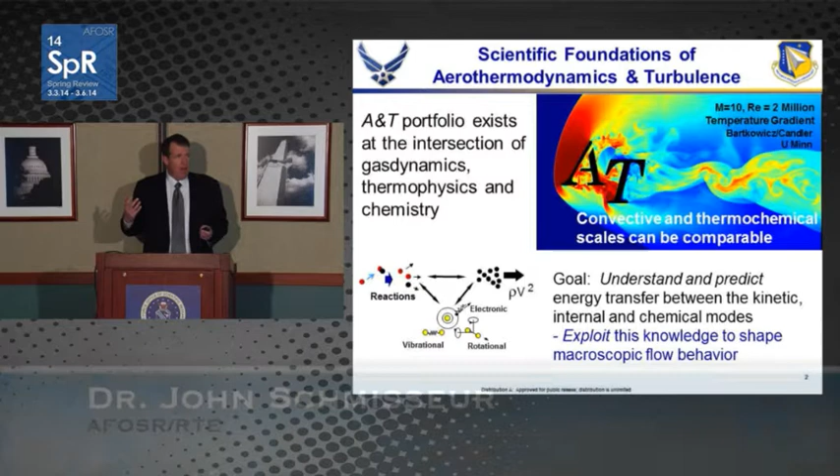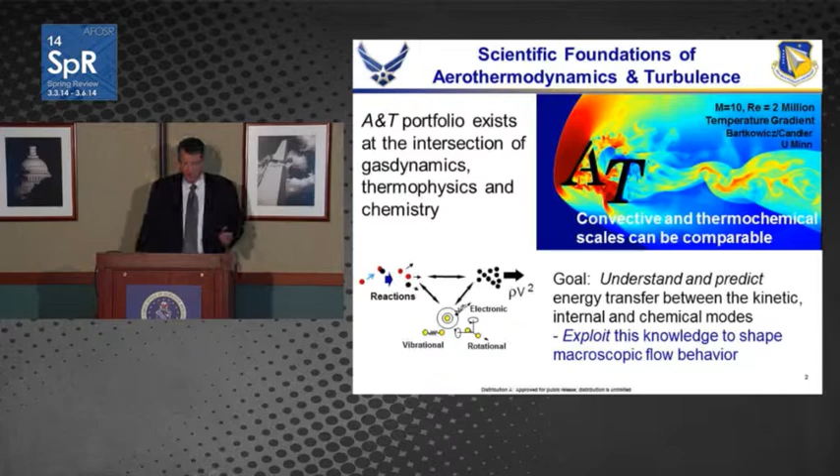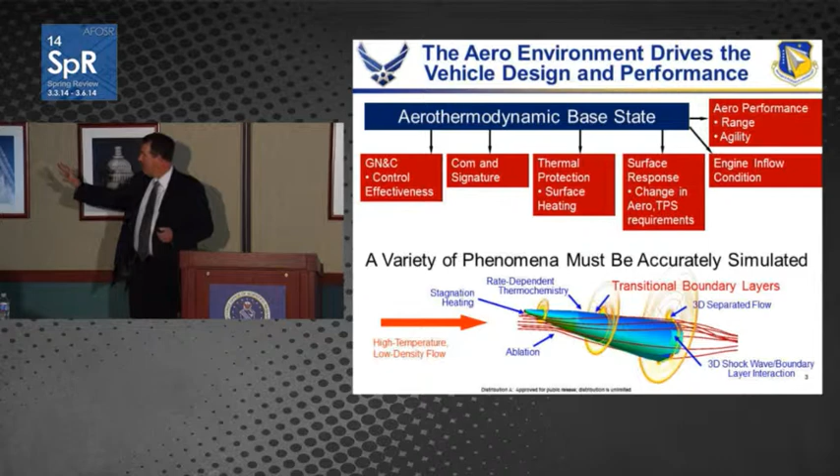I would also argue that this presents an opportunity. If we can understand energy transfer mechanisms between the various modes - kinetic, chemical, internal energy modes - and exploit them, it gives us a new opportunity to do a different type of flow control for these very high-speed flows. This is important to the Air Force because the aerodynamic base state creates the boundary conditions for every other aspect of the vehicle we'd like to design and optimize for high-speed systems. So if the Air Force is going to develop high-speed systems in the future, getting the aero base state right is critical, and my portfolio addresses the underlying scientific challenges of doing that.

The reason this is important to the Air Force right now, and it's always been important for the last 60 years, ever since von Karman wrote Towards New Horizons, high speed has been a critical part of the Air Force plan and vision. But lately, as we look at the pivot to the Pacific and ideas that we want to operate in this anti-access, area denial environment, we're considering...

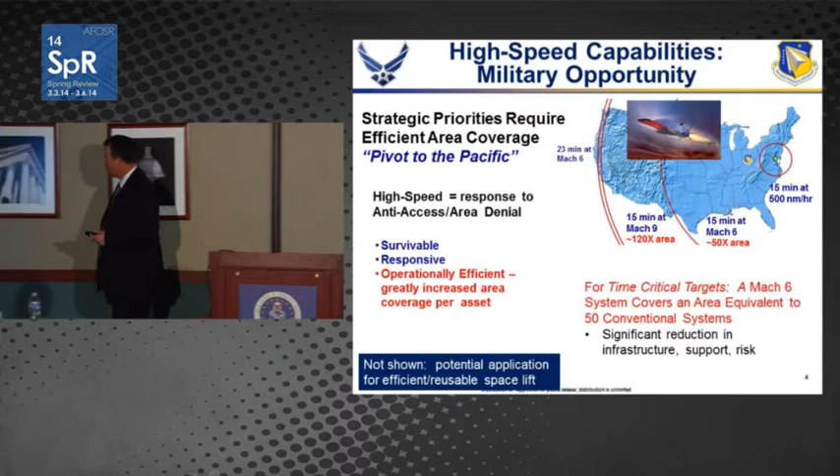Let's use the United States as a reference map here since we're all familiar with the scales we're talking about. If I'm in Arlington, Virginia, and I decide I want to deliver something using a conventional system, in about 15 minutes, shown by the red circle, I can cover most of the Mid-Atlantic region. But at Mach 6, I can get to the Rockies, and at Mach 9, I can get to the West Coast. So if we switch gears and think about having a franchise, say delivering pizzas, using conventional systems, I'd have to have 120 franchises to cover the same area that I can cover at Mach 9. That's about a factor of 50 increase at Mach 6.

The point is, it doesn't matter how expensive the weapon is. If I want to hold an area covered for a specific amount of time, I have leverage - area covered per time. The range gives me that added benefit, and economy of scale allows me to cover a much greater area. So I can essentially reduce all the infrastructure, all the requirements, all the security needs. One or two very secure delivery centers may be much better off economically than, say, 50 or 120 at lesser speeds.

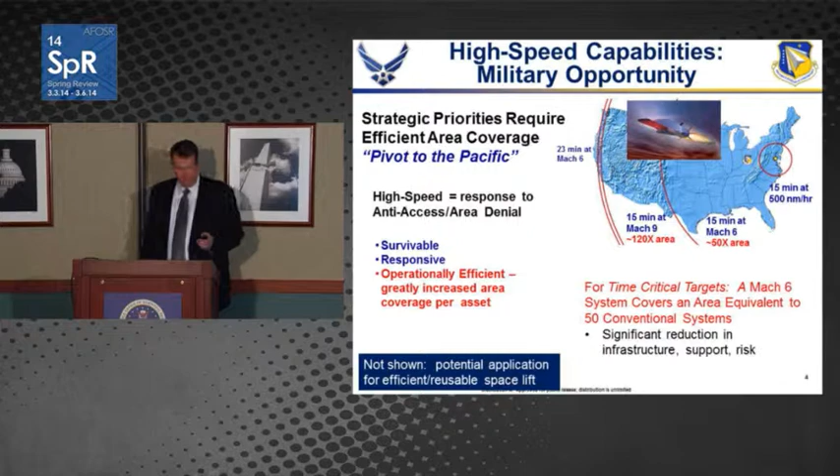So hopefully what we've done so far has set the foundation for the talk - we're addressing challenging science, and it's relevant to critical needs of the Air Force. For the rest of the talk, I'm going to do a couple things. First, we'll talk about the summary of the research thrust in the portfolio - we'll hit the big picture, what the national picture for high-speed research looks like. Then I'll hit some technical highlights and where we're going.

What I want you to get out of that is that we are in a unique position. The way the big picture is, our portfolio has a demand on it - we have a mandate to be transformational and to have leadership in the community. We are, in fact, leading transformation in certain areas. We're organizing the community, and we're establishing new research opportunities for the community as well.

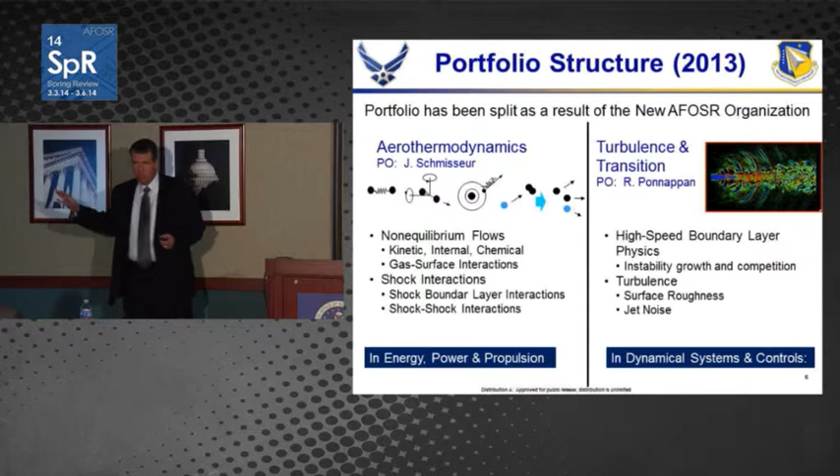Until last year, this portfolio was a single entity that comprised what I'm going to tell you today and the portfolio that Raj Ponnappan briefed on Monday. When I became department chair last year, we split the portfolio into two components. I now manage Aerothermodynamics, Pon manages turbulence and transition. We had 4 research areas that I would have briefed in years past. Today I'm going to focus on the 2 that remain in my portfolio: non-equilibrium flows and shock interactions. Let's get to both areas right now.

If we're going to have better simulations of high-speed flows, we have to reduce uncertainty in both the reactions and the rates. Ideally, you would like to know enough where we can exploit this transient phenomena. We have some partners we work with, including NASA, Sandia, and in the international community we do a lot of work with the NATO RTO group.

Shock interactions, you can't avoid them for high-speed flows. Every high-speed system we have has a shock interaction in it of some type or another. The challenge is, if we just look at the zoom in here, it creates a lot of distortion, a lot of local loads on these types of systems, and we can't predict them. You may have a local separation phenomena, a local reattachment phenomena, where you suddenly produce a significant heat transfer increase or a surface load of 150 decibels into the structure. We simply are challenged to predict those at times.

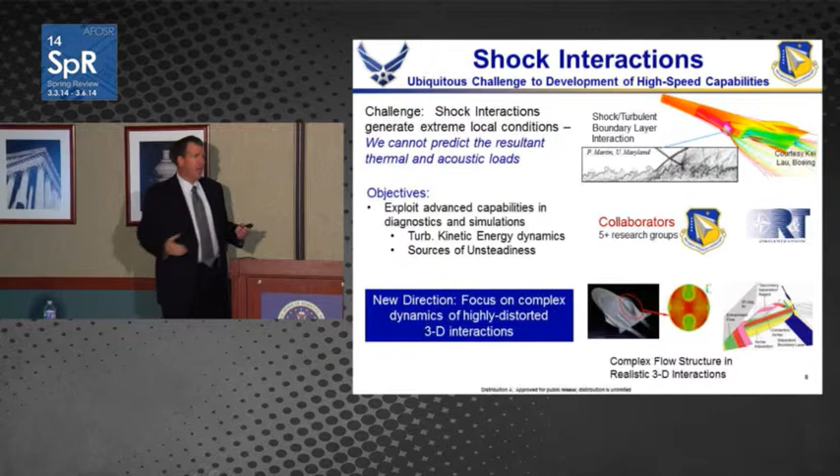So we want to start improving that. We have to understand where the kinetic energy goes in the turbulent spectrum, particularly when it's processed through a strong shock interaction, where the unsteadiness comes from, and eventually we're going to move towards 3-dimensional flows. In fact, that's where I think our leadership is going to be -- leadership within the portfolio, our contribution is going to be taking the community into new directions to look at these highly distorted 3-dimensional flows.

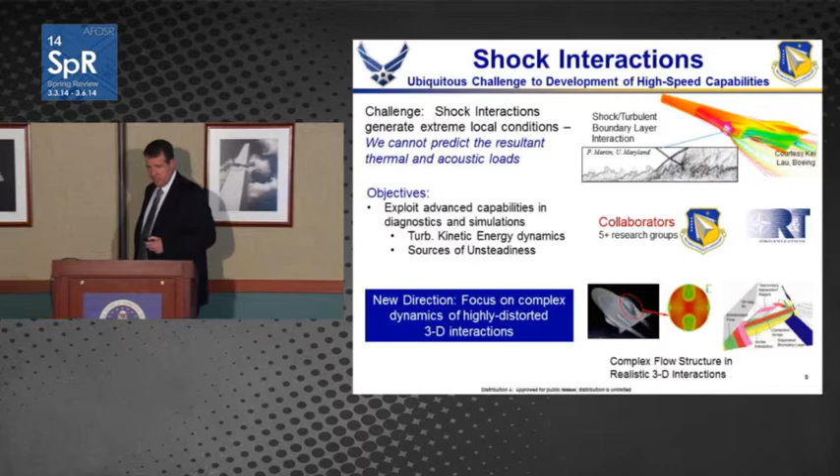This is the big picture for hypersonics. Now I want to put a brief commentary on here: this is not the hypersonics portfolio. When I took over this portfolio 13 years ago, it was in fact called unsteady aerodynamics and hypersonics, but hypersonics is technology and not a science. So there are 3 portfolios at AFOSR that actually address the critical science relevant to hypersonic technologies.

It's useful, I think, though, to look at budgetary investments to give us a sense of what we're dealing with here and where our mandate comes from. The nation invests several billion dollars every couple of years in the development and maturation of high-speed hypersonic systems. Every time we fly a flight demonstration, we're looking at a $100 to $400 million investment, and those are typically developed, analysis done on those based on decades-old tried and true engineering tools. And we wonder why these things sometimes fail or fall out of the air.

If you compare the foundational research investment, the 6.1 national push to feed the pipeline that's going to give us better tools, right now we're putting about $12 million a year nationally into these types of things. And my portfolio is just one portion of that. So the challenge is that there's very few investments out there. If we're going to have an impact, if we're going to transform what's going on, we can't miss. We have to be both transformative and risky. We have to transform current practice, really organize the research community, and create innovative new ideas and research opportunities to take the scientific community in the direction we need to go.

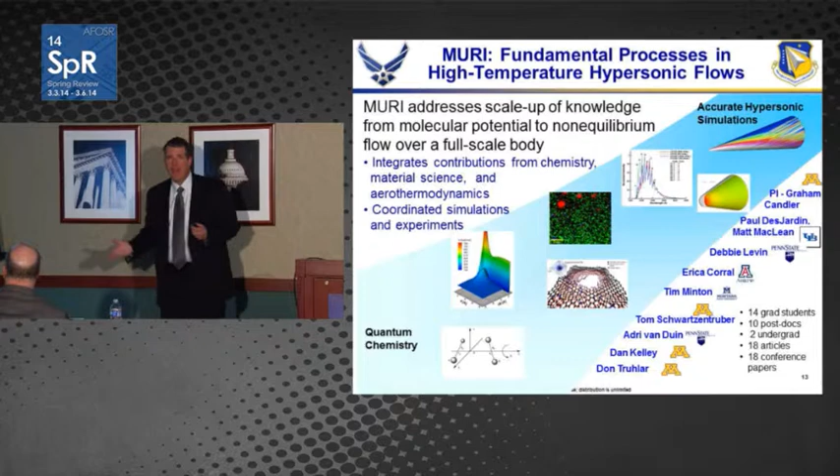Starting at the quantum level, we're computing potential energy surfaces that give us the intermolecular potential. Then we apply those in molecular dynamics simulations, scale up at the mesoscale, and finally get to CFD, continuum model simulations. All through the process, we have companion experiments actually validating and providing guidance, confirming that the physics is being done correctly.

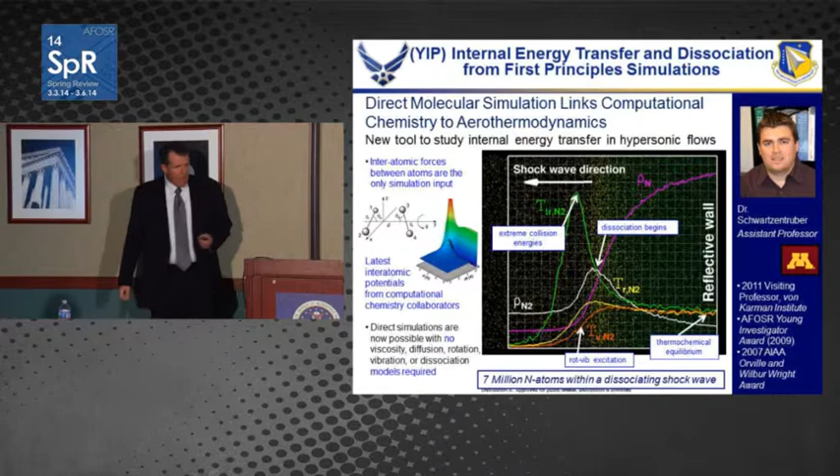One of the highlights I'd like to show is from a member of that MURI, whom we also sponsored under YIP. This is Tom Schwartzentruber from the University of Minnesota. Tom has used these quantum potential energy surfaces to inform molecular dynamics simulations, and then incorporated that into some of the CFD methods we use for particle simulation, something called direct simulation Monte Carlo.

In the past, where we would model potential energy, we'd model various reaction rates. Using these potential energy surfaces, Tom can actually use that as the only modeled input that goes into the computation of a strong shock wave. So this is a classic case of a shock tube.

Shock bounces off the reflective wall, moves back, creates a very elevated temperature condition at the end. The yellow dots are nitrogen molecules, the green dots are nitrogen atoms, and what you can see is he's plotted on top of that the various internal energy states.

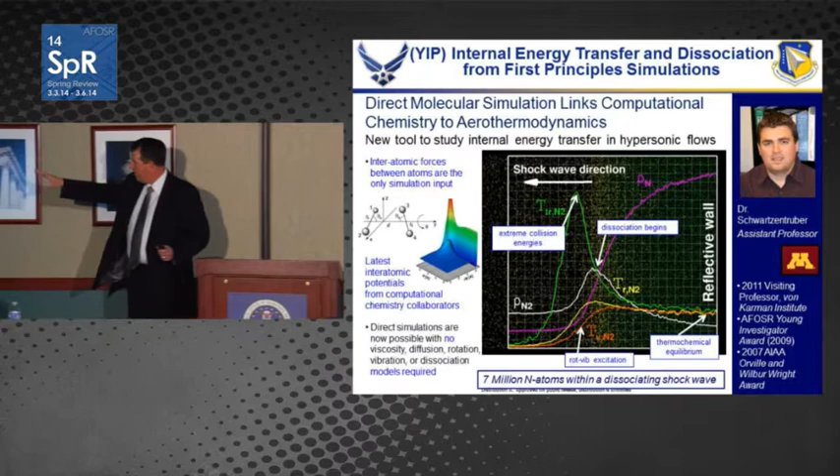We have for the first time basically a direct molecular simulation, the particle analog to a continuum direct numerical simulation, essentially a model-free simulation of the transient internal energy states associated with a shock wave. And we're really excited about where that's going.

This is a simulation of about 7 million particles. One of the things Tom did to improve his simulation capabilities is also scaling up the way he does simulations. So he took molecular dynamics, looked at it, and said some of my DSMC methods would apply to making these simulations better. So he came up with an improved version of this.

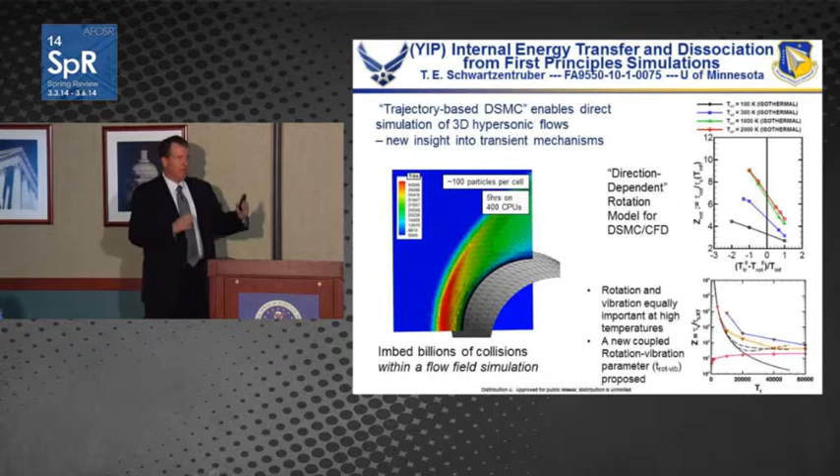A lot of times in simulations, they'll compute a particle, it bounces off something, they have a collision, and it kind of sits there. What Tom said is, I can redo the algorithm, do the numerics, and accelerate all that time between collisions, therefore focus most of my computational time on the collision part itself. He's able to speed up the process and have much larger simulations than we previously would have had.

As a result, we're looking at now applying this method to relevant flows, such as the nose tip here, embedding billions of particle collisions within an actual flow field simulation. In applying this in some of the preliminary work, we've had some very interesting discoveries.

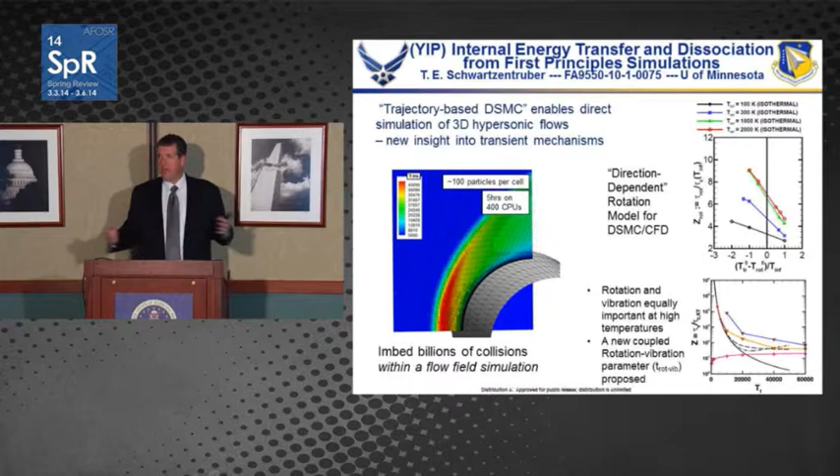Traditionally we would model the rotational excitation or de-excitation, the rotational characteristic time, as kind of being one representative number. Tom's simulations have indicated that, in fact, the excitation state for rotational states is a much faster process than the de-excitation or relaxation state. And in fact, there are several associated timescales involved, one for excitation, one for relaxation. The two are separate, and modeling them with just one representative timescale is probably not the most accurate approach.

We also have international and military partners involved with this. This is actually a joint effort between the University of Queensland and AFIT. We're sponsoring the AFIT part of this. Work's being done by Captain Chris Alba, who I've known for a long time, and I expect to have a real impact on where we go in this field in the future.

At the University of Queensland, they're using an expansion tunnel to create a very high enthalpy hypervelocity flow over a heated carbon piece that represents a nose tip. They're making spectroscopy measurements and looking at the radiation emission from the CN compound formed as part of that interaction.

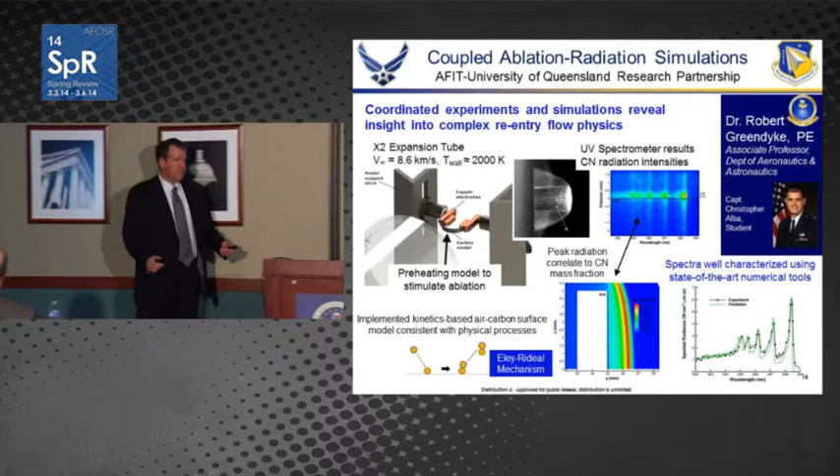What they're doing at AFIT is using some of the methods developed in the portfolio to look at that radiation, model it, and on the lower right-hand side here, you can see that the actual simulations are agreeing quite well with the experimental data. We're excited about this, and I think it's a great international component within the portfolio.

Now let's move on to another topic. Our new research direction is looking at energy transfer. Historically, this portfolio has always been considered the hypersonics portfolio, and that's a good thing, it's relevant, but it's not all we do. A lot of the science we do is relevant to other things. We wanted to try and rebrand ourselves to think about what's the science we're actually doing.

So we've been emphasizing this idea that we address fundamental mechanisms of energy transfer. That allows us to start thinking about other things. I would say that the gas surface interaction, in a more generic sense, is something that we can really contribute to, various types of thermal management and energy phenomena. But it's also positioned us to try and interact in a more positive way with the other portfolios within AFOSR.

We've been very fortunate to be the recipient of one of our basic research initiatives that has really fostered some integrated work with 4 other portfolios within AFOSR, and we've benefited from it. I'm going to talk now about a couple of the BRI efforts. I would note that one of the key things out of this BRI is that a lot of my PIs are now doing work as PIs in other portfolios within AFOSR. I consider this missionary work. My PIs are taking ideas from my portfolio, awareness of what the challenges are, out to chemistry, the plasma dynamics portfolio, other places, and they're going to come back later on with new techniques, new methods, new insights, and we'll apply them to things that are of interest to my portfolio.

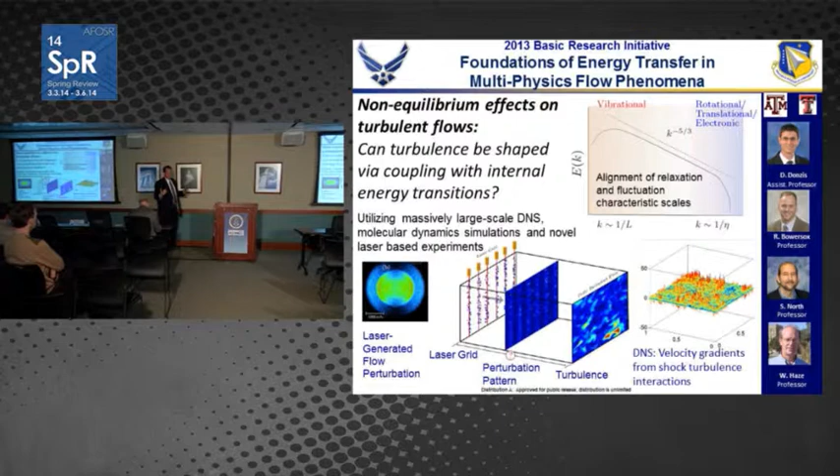Bill Haze, you heard Mike's work this morning talk about. So asking the question, if you look at the characteristic turbulent kinetic energy spectrum, can we align relaxation times from different internal energy states? It's color-coded here. You can see vibrational relaxation at one end, rotational, translational, electronic at the other. Can we shape the turbulent kinetic energy spectrum by lining up strategically the characteristic timescales of the fluctuations with different relaxation rates? We're about a year into this.

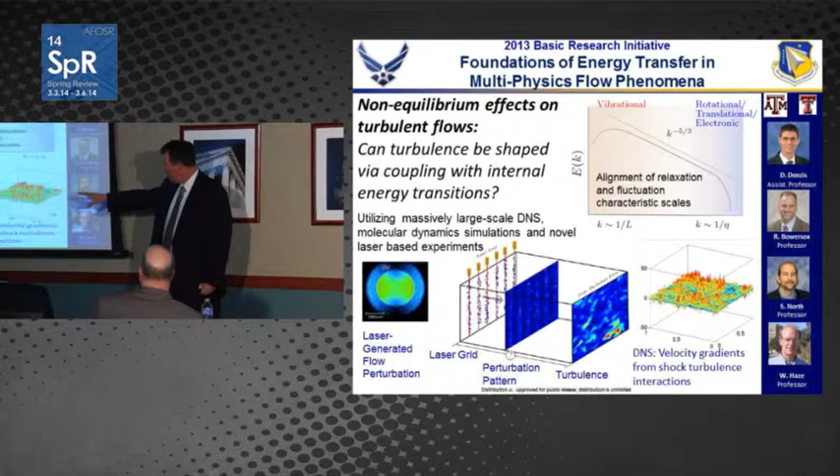There's a lot of work yet to be done. It's looking very promising. But here's what these guys are doing. They're creating a combination of experimental and direct numerical simulation work. On the experiment side, they're creating these grids of very well-controlled turbulence.

You take a flow field, you seed a couple of molecules into it. One of them is SF6, the others I can never remember because I'm not a chemist. But some molecules you introduce, depending on which trace component of gas you introduce into the flow, you can photodissociate it with the laser. And then based on your gas choice, you can create pure rotational, pure vibrational, or pure translational energy in a very regularly spaced, spatially oriented turbulence grid.

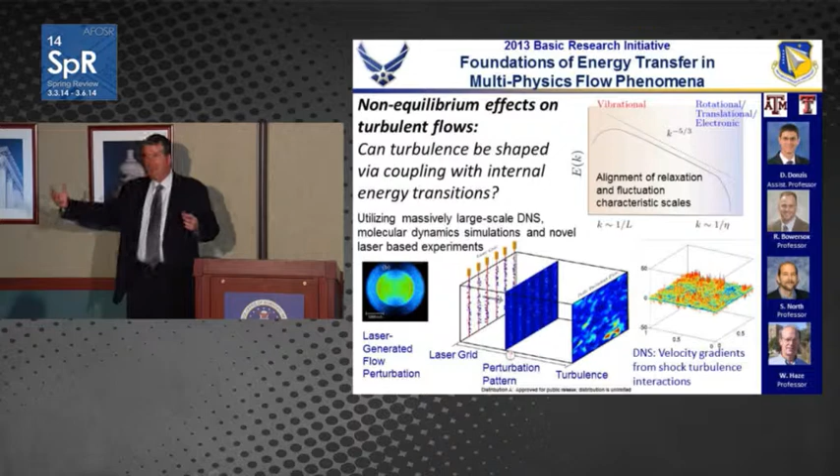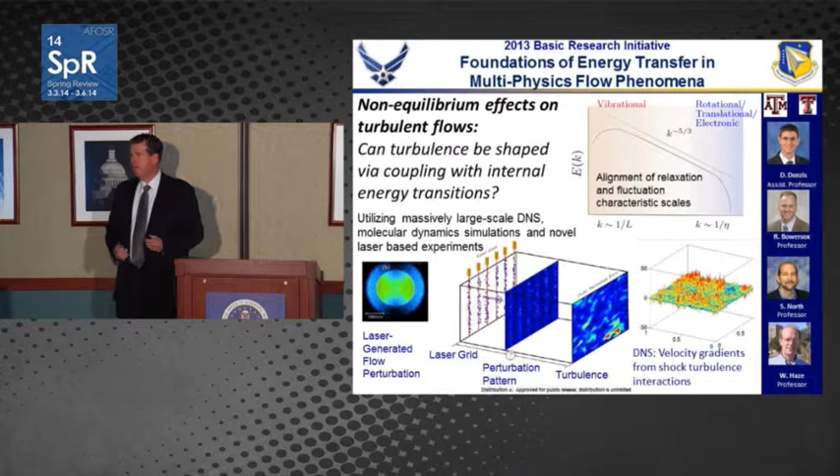So we're now creating well-defined turbulence of a very specified type in terms of the internal energy state. And then we can watch how it relaxes over time with some of the diagnostic methods these guys are employing. In parallel, Professor Donzis is doing simulations of these types of flows using very large-scale direct numerical simulations. So we're looking both from a modeling and an experimental side at the detailed energy reactions that are occurring.

One of the interesting things also at play here is that the Texas A&M guys have a diagnostic method that's kind of based on the same type of effect. The Venom technique is vibrationally excited nitric oxide monitoring. What they do is seed nitrogen dioxide into the flow field, use that same photodissociation process to create excited state nitric oxide. That nitric oxide, they can then interrogate using planar laser-induced fluorescence.

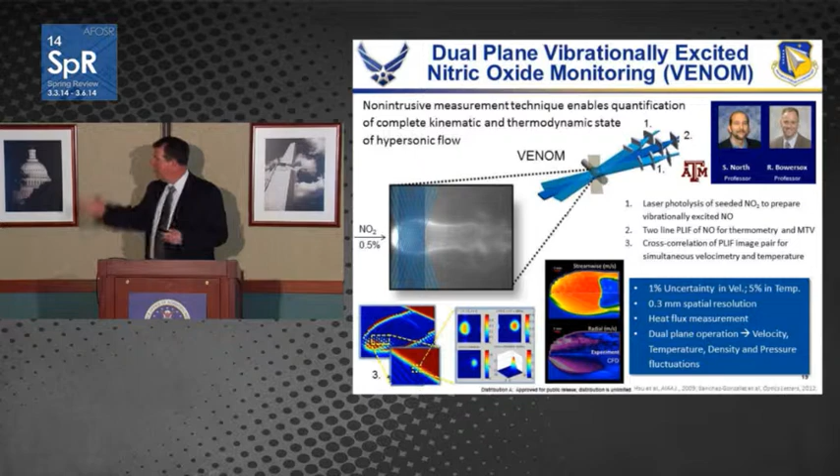And the bottom line in all this is that using a dual-plane approach, they can make simultaneous measurements of the velocity, temperature, density, and pressure fluctuations. If you look at some of the things we want to model in turbulent flows, being able to look at all those things simultaneously allows us to look at some of the turbulent kinetic energy and stress rates and other things that have been a challenge to measure experimentally in the past. So this provides us a great opportunity to look at new insight into the physics of turbulent flows.

Now this is the other BRI I like to talk about. This is work done at the University of Texas, led by Phil Varghese, including Noel Clemens and Venkat Raman. It's very qualitatively similar to what we've talked about in the last couple of highlights, but this is different because it's looking at supersonic combustion and the role of non-equilibrium processes in that combustion process.

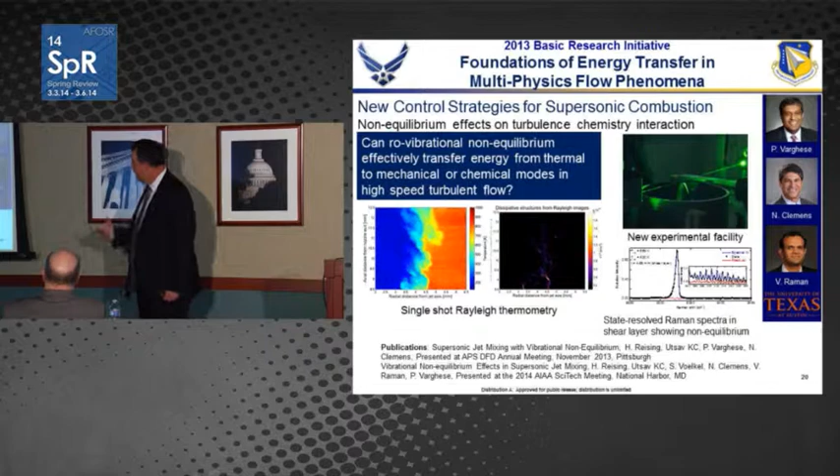So they've got a new supersonic burner facility, and they're applying state-of-the-art spectroscopic diagnostics to that. But they also have a very interesting numerical approach. Earlier we talked about Schwartzentruber's work and how he has potential energy surfaces that have been developed, and then he uses those as the only modeled input in his simulation.

And it's interesting when they started employing this in some very large-scale simulations. The direct numerical simulation of a non-equilibrium hot jet is shown here. We think this is the first - you always hesitate to say this is the first of its kind - but we're not aware of much similar work like this out there. So this is a DNS of a supersonic reacting jet, including the thermal non-equilibrium inside that.

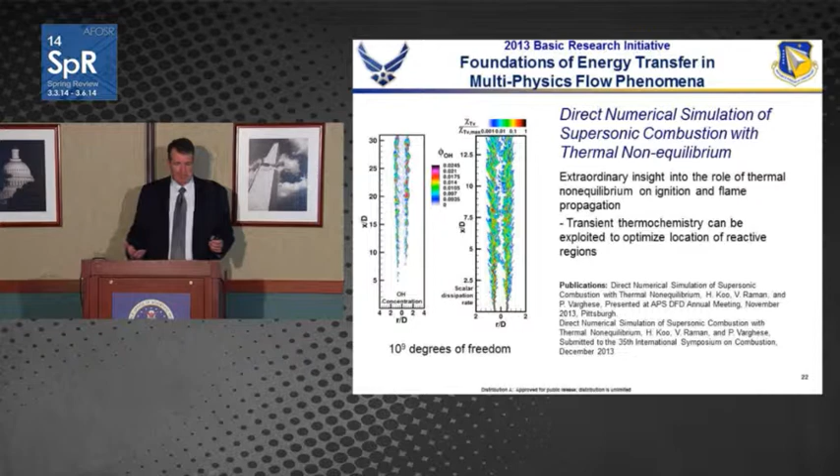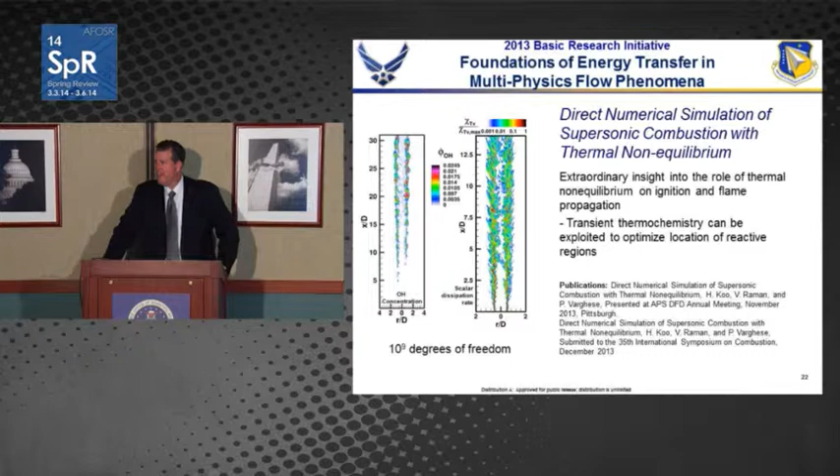It's about 10 to the 9th, like a billion different degrees of freedom in this simulation. It's a very complex thing, and we're interested to see how it's going to turn out.

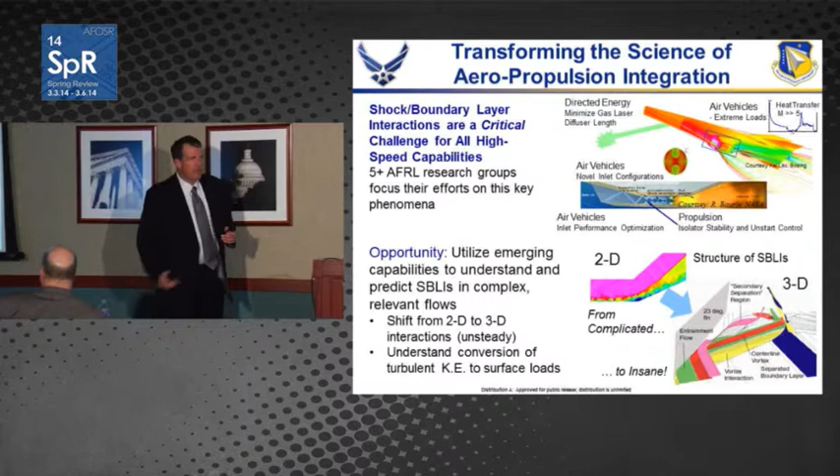The other area I want to talk about is shock interactions. They're ubiquitous, they're everywhere, they're a pacing issue for high-speed flows. They're of interest to a lot of things as well. Looking at our icon of a high-speed system, they create extreme heat transfer on the surface, incredible acoustic loads that have to be handled in the structure, and they can cause distortion and unstart in the inlet.

That circle with the green blobs in the middle is what happens to the inlet of an axisymmetric configuration when you've got it off-axis angle of attack. So that's what happens when a shock interaction occurs inside a round inlet, and those green blobs are the low momentum boundary layer fluid that's going to get sucked into the engine and potentially cause unstart. Understanding this phenomenon is a pacing issue for development of high-speed propulsion.

Interestingly, those directed energy guys are interested in this as well. If you're looking at a directed energy gas laser and want to incorporate it into an aircraft, the diffuser length is a really important part of that. I can't have 50, 75 feet of diffuser to slow down the gas used for the laser. So those guys rely on a very well-controlled shock boundary layer interaction to minimize their diffuser length.

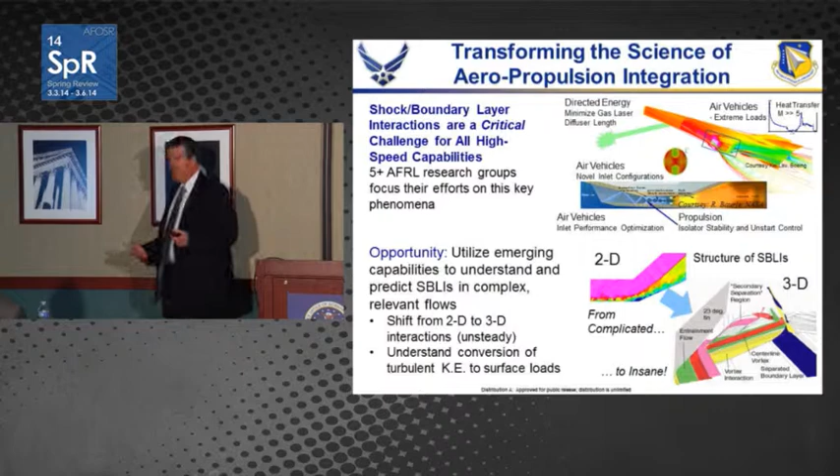So beyond aerodynamics, there's a lot of gas dynamic potential things that can occur that shock interactions are part of. I think the directed energy one is very interesting because it's a very low Reynolds number, non-equilibrium process, and I think we could take some of the methods we've been developing and really attack that problem.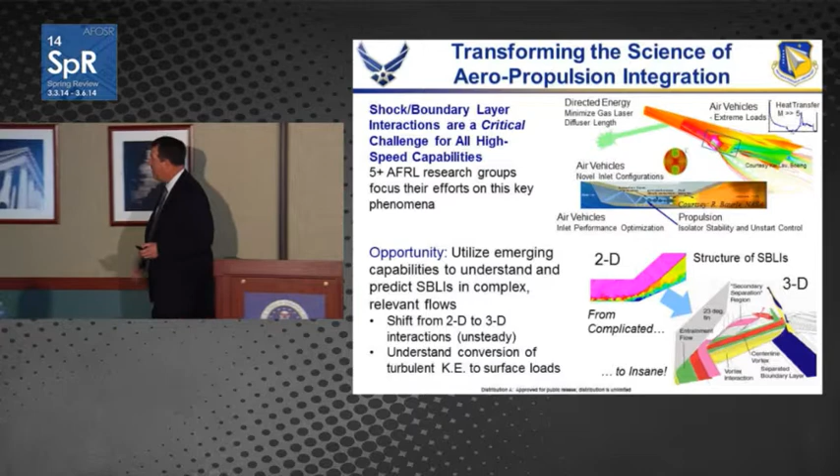There's about 5 different groups in AFRL interested in this as well, and we've been working to coordinate and ensure they're all talking to each other. So our opportunity is to utilize some of these emerging capabilities to drive this in a direction.

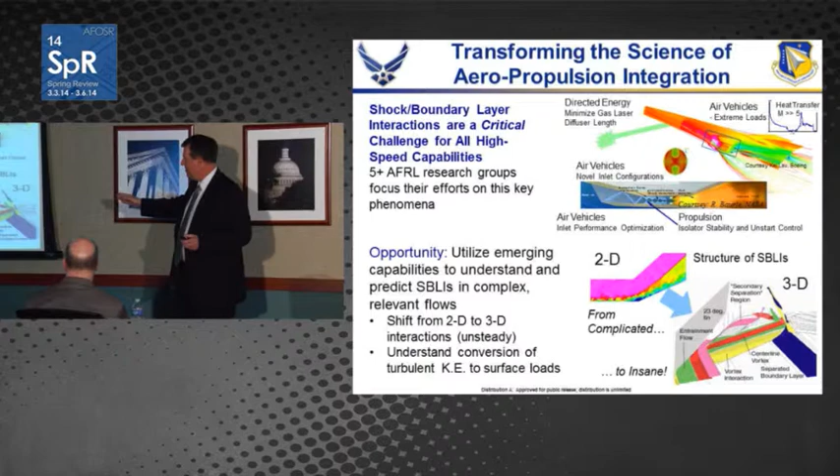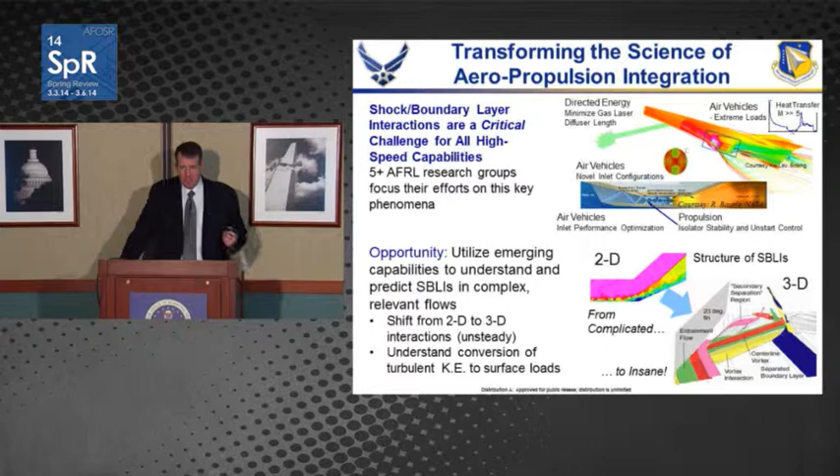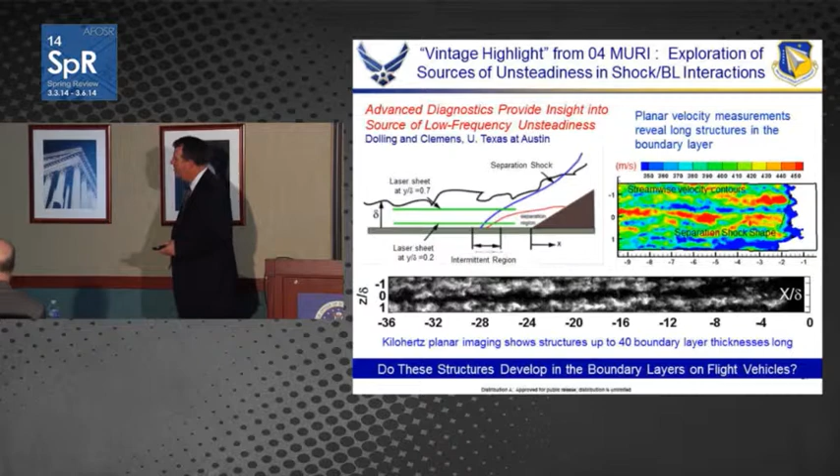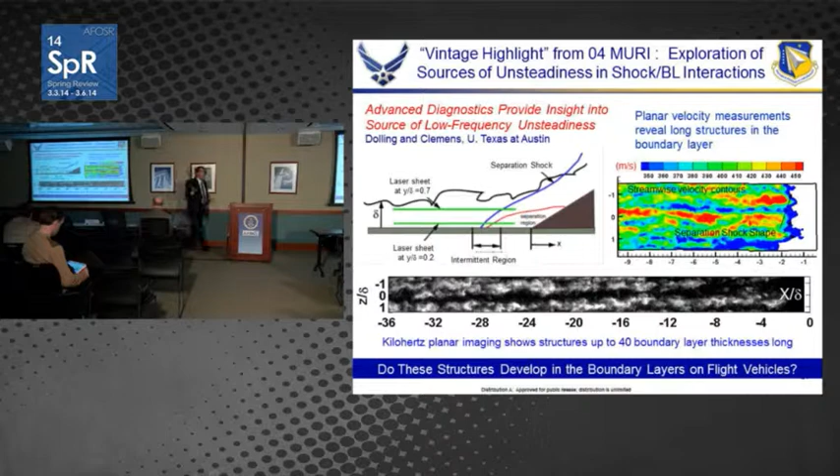This is a little look back. In fact, I brought a vintage highlight from 2004 - this is a MURI that started then, so I'd say I probably showed this between 2007 and 2009. This is work by Dave Dolling and Noel Clemens at University of Texas. You can see their two-dimensional ramp-generated interaction in the upper left-hand corner. What we're looking at is a couple of images of the flow, the turbulent flow going into that interaction.

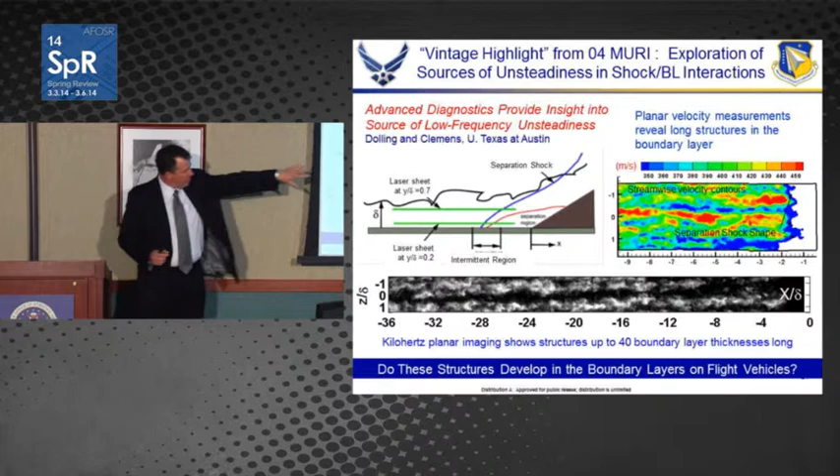That white area on the right-hand side is the shock wave ripple structure in a span-wise direction. So notionally, this is a two-dimensional interaction, and it should be kind of span-wise symmetric, except these hot streaks in the boundary layer - these long, coherent, organized streaks - are actually driving this span-wise rippling. We've got this span-wise variation, and the dynamics of that.

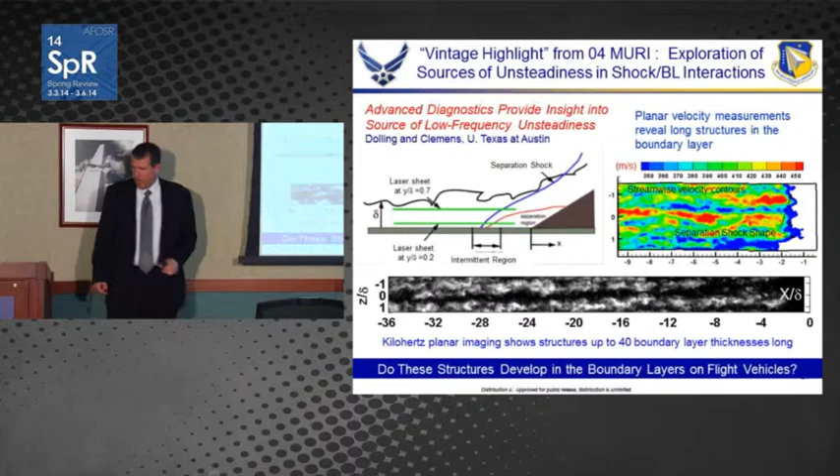This is images from their wind tunnel test showing these long, coherent streaks in the boundary layer. They indicate that this actually drives a span-wise unsteadiness effect. That unsteadiness can generate, in two-dimensional interactions, acoustic loads of 140, 150 decibels. That's important - we have to take that into account.

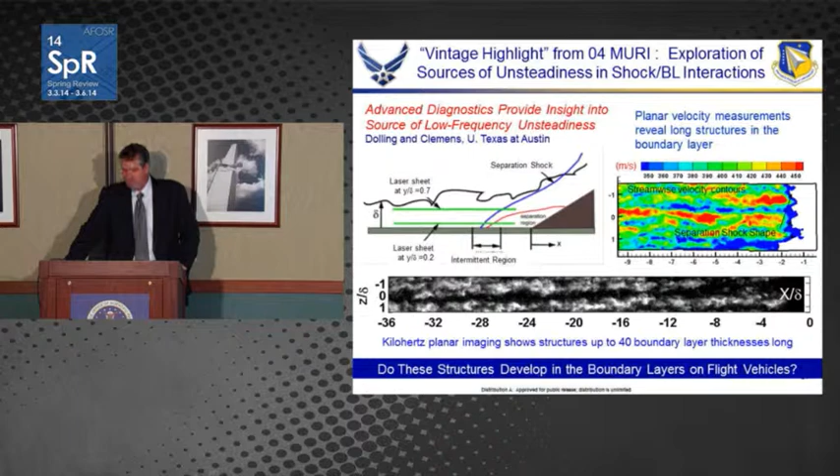But this is interesting - Pino Martin out of the University of Maryland did some direct numerical simulation for us, looking at these phenomena as well. She sampled her results and looked at the development of hairpin vortices that would contribute to the growth of these superstructures. One nice thing she did was actually sample her simulations analogously to the way we would do experimental work, so you had an apples-to-apples comparison.

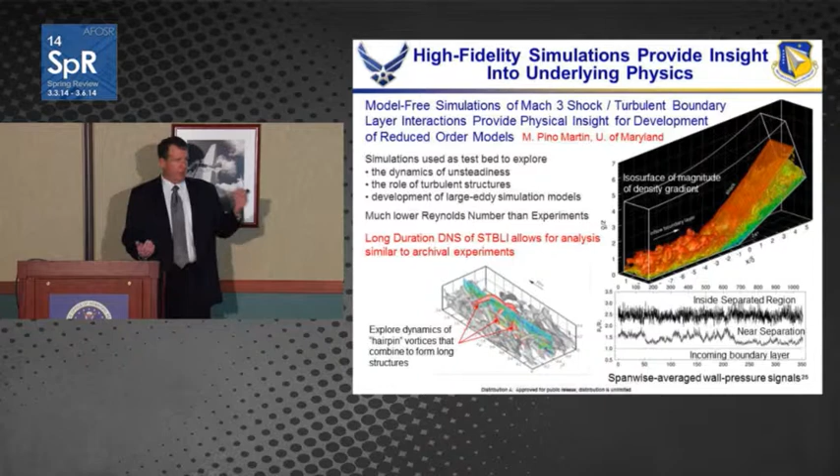Here's what the experimental guys got, and she sampled the DNS in the same manner, so you can compare them both. What you see is that, in fact, she sees some low frequency unsteadiness as well - again, all looking at these two-dimensional interactions. HIFiRE Flight 1 gave us flight data on this type of phenomenon.

So we never understood whether these long structures, this fundamental unsteadiness, came from a wind tunnel artifact or whether it was something we actually had to worry about in flight. So one of the things we wanted to get out of HIFiRE Flight 1 was, what does the unsteady nature of shock interactions look like?

The data from HIFiRE Flight 1 is shown right here. I've shown the HIFiRE flight data and then data from Dolling and Murphy from probably around 1990. Qualitatively, the same unsteady nature appears in both. So we know this is a phenomenon that occurs on flight vehicles. It's not a wind tunnel artifact.

We need to understand a little more. There's been a lot of work trying to understand this. In fact, the community has focused on this for the last several decades. So why are we going in a different direction? Here's why: we're not going to hang square inlets on a box underneath future systems.

Future systems are going to look like this. They're going to have axisymmetric inlets. They're going to be integrated in some fashion. They're going to give us highly three-dimensional flows. And so all the dynamics, everything I've talked about with these nice, low frequency unsteadiness, there's a recirculation bubble in there, and a lot of people have been looking at how does that bubble dynamics work?

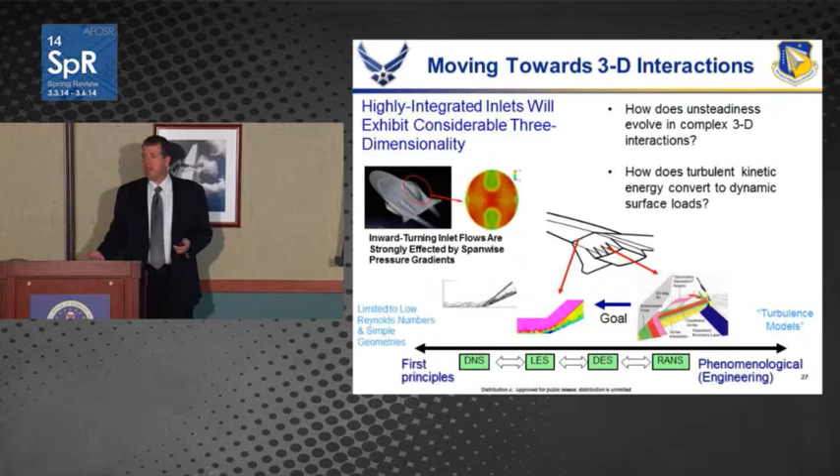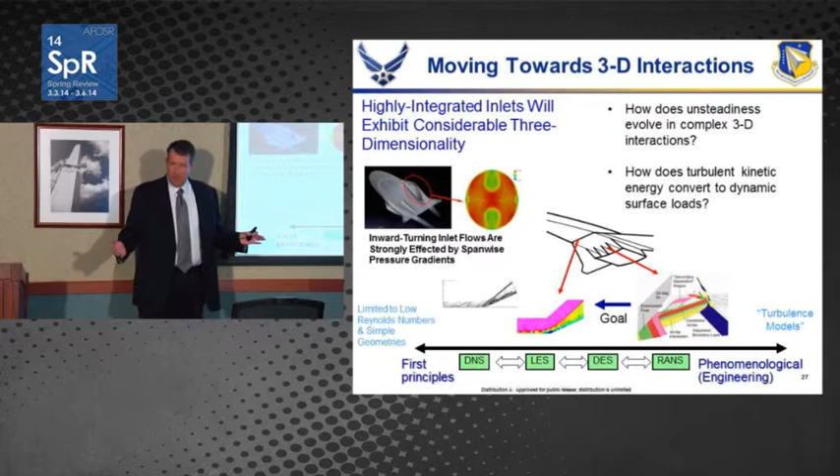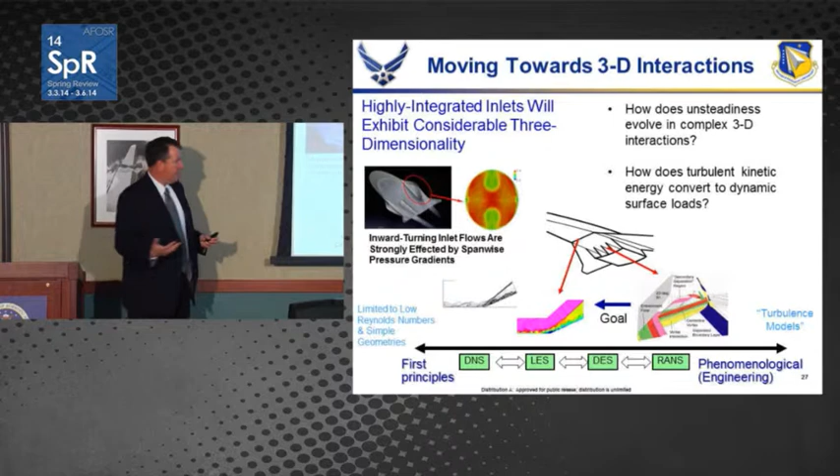It's going to be hard. Right now, the only thing we can do for some of these three-dimensional flows is Reynolds Averaged Navier-Stokes, which any of our scientists know that's not what we want to do. We've got a lot of modeled terms in there. Turbulence models always give you problems, but that's what we can do right now for very large three-dimensional flows of this type. Our goal is to start moving this more toward high fidelity, looking first at detached eddy simulations, LES.

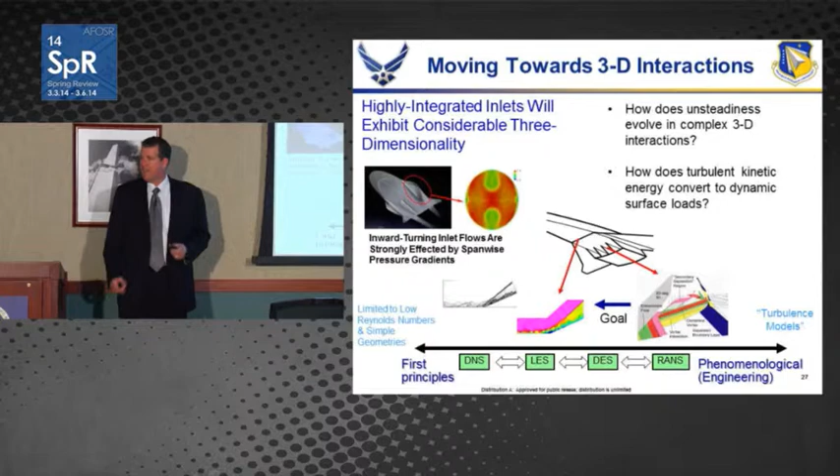I don't know if we'll get to DNS, under very, very low Reynolds number, very controlled conditions, possibly. We've got to start looking at more high fidelity simulations of this type of flow, and we want to start taking the community in that direction.

So let's summarize real quick. There's a very strong application pull for what we do in this portfolio. The Air Force is interested in this. It's needed. We've got very limited resources. On a national level, we are the program addressing things in this area. We partner with other things, but as far as the DoD is concerned, we're it.

But there's broad potential impact. And so I would argue that we have a portfolio mandate. We must transform current practice. We have to organize a research community, and we need to create new research opportunities. The three things I've shown today, I hope, address that. Going kind of in reverse order.

We're trying to transform the way we look at high-speed inlets and shock interactions by focusing on three-dimensional aspects. The work we're doing in gas surface interactions, really bringing together the chemistry, materials, and fluid dynamics community, is innovative. We're looking at integrating molecular dynamics simulations. I would argue that most of us would have predicted this. We would have seen that coming. That's the next logical step. It's hard, we're at the forefront, but most of us would have said, yes, that's the next logical step.

I would argue that what we're doing in energy transfer is unprecedented. I haven't talked about some of the things that have come out of the portfolio. I think Pon has some things in his portfolio in terms of transition control with kinetic energy to internal energy state transfer, but exploiting the energy transfer between internal energy, chemical, and kinetic energy states for the purposes of flow control at a macroscopic scale is something I think we have not really thought about, and I would argue that's an unprecedented direction. So again, we have a balance of things in the portfolio, and I'm really excited about where we're going with it.

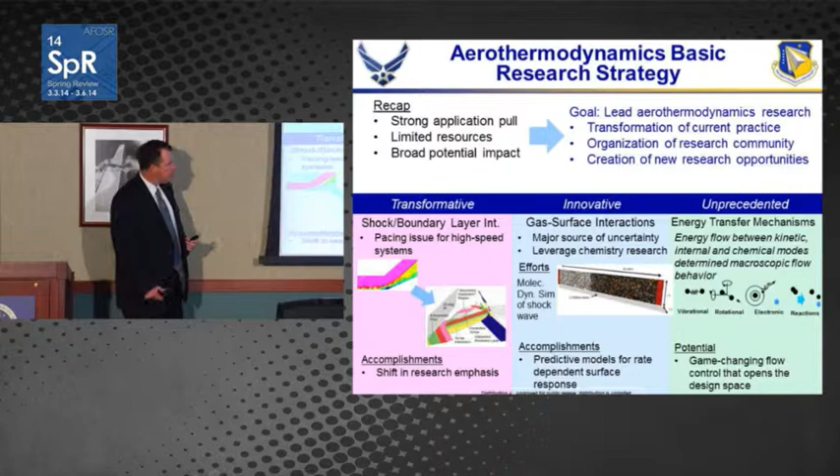I want to wrap up with giving credit to the guys who deserve the most credit for this work, and this is our PIs. I hope a lot of my PIs are watching this because I'm very proud of all their contributions.

This is a list of just some of the things our current PIs are doing. We've had some alumni that have gone on to some significant things.

A number of tech transitions two years ago now, so we're a little out of date, but AIAA gives three summer technical awards in the fluid dynamics community. Two years ago, we got all of them. We had the trifecta, guys in my portfolio receiving prestigious national awards. I was really proud of that.

Every one of my PIs is a leader. They're exceptional at what they do, and I'm really proud to have them in the portfolio. So with that, let's summarize.

We're addressing challenging science that is critical to Air Force future plans. We have a unique national role. We're trying to lead transformation in terms of shock interactions. We're organizing the community and what we're doing in gas surface interactions. And we're looking at some really interesting, unprecedented new research directions in terms of energy transfer.

And I appreciate your time today. I'd be happy to answer any questions. Or I could turn my exit music on.

John, I have a question for you. When I see transformational and 3D shocks, I think, oh my God, it's deja vu all over again.

I started in graduate school back in the late 80s. That's exactly what was going on in those facilities, the gas dynamics facilities that had the capability to do that. Penn State, Texas, Princeton, they were doing these 3D interactions. In fact, it's kind of crazy to see these pictures again. So what's transformational now? Why did the focus shift to 2D, and now you're saying it's coming back to 3D? Is there some continuity there that we can draw a line between these things and say this is why we're doing this?